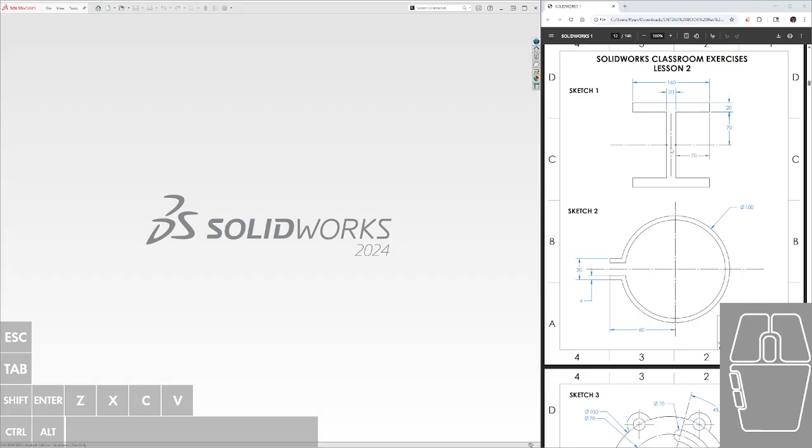This will be a video on our week 2 sketches. I'm going to go through just the first 3 sketches to show off some new techniques. In this first one, I'll show how to mirror. On the second one, I'll show how to use the offset tool. And on this third one, I'll show how to use a circular pattern as well as how to make slots.

Let's begin. This one's a fairly simple part with just lines, fairly similar to your week 1 sketches. But the new thing we're going to learn is similar to the symmetry relation, where we use the center line and 2 lines on either side of it, and use symmetry to essentially mirror the distance that line is from the center. We can also use the mirror tool to take half of a drawing and mirror it over a center line to copy and paste it flipped on the other side.

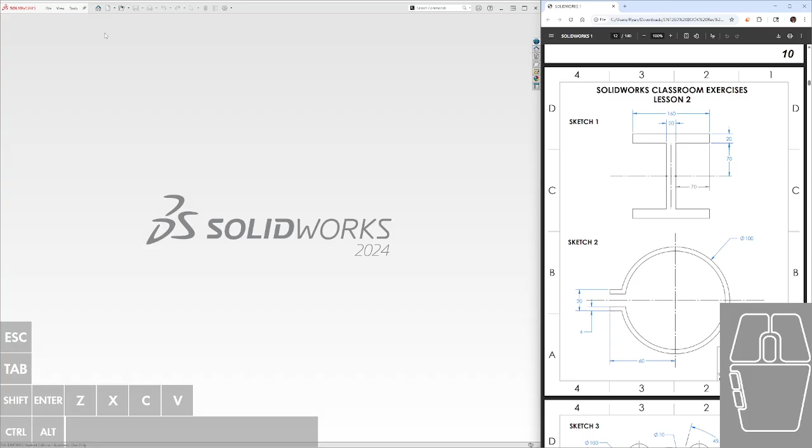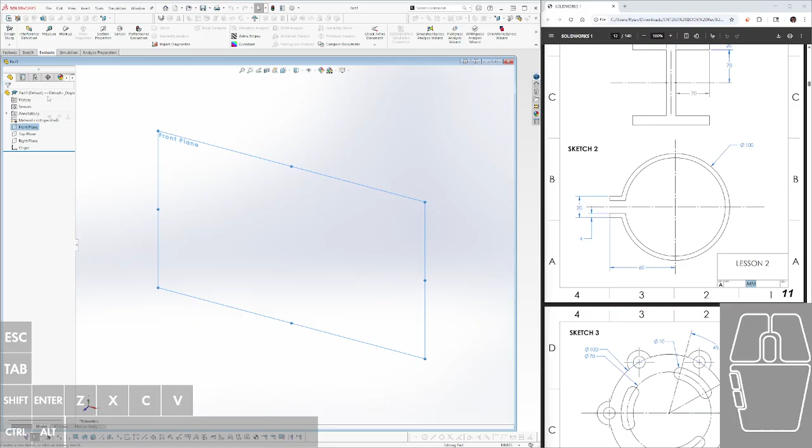So we'll be making a new part. Like always, we look down at our sheet and find that our units are in millimeters. So going to SolidWorks, we have to make sure our units down here are in millimeters as well. And we will make a sketch on the front plane. I'm clicking on front plane, clicking on sketch, and we'll zoom into our part.

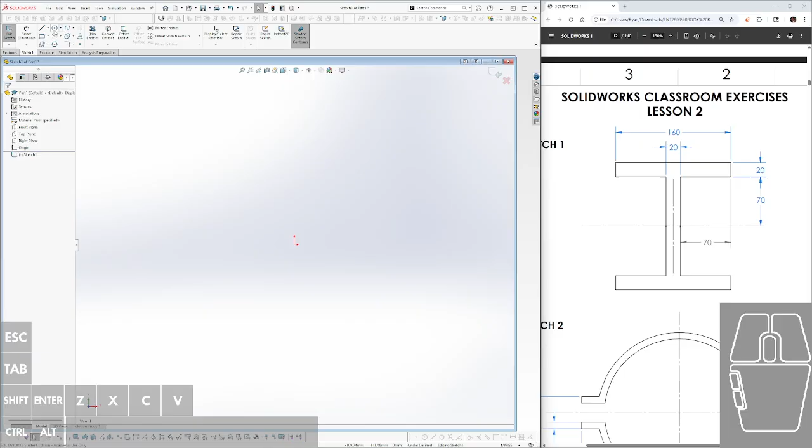So starting with the center line, I'm just going to put this dashed line right through the origin of my part to anchor it. You can see the yellow boxes that pop up next to my cursor are the coincident icon and the horizontal relation icon, showing that the line is horizontal and includes the origin within it.

So we'll start with that, and then I'll draw just the top half of this I. From the left of the origin, I go up, over, up again - and actually I'll show mirroring both horizontally and vertically using the center line. So I'll go up, over, up, and to the right, up to this middle point, and then we'll flip that over, and flip that over again. I'll take my line tool, hold down right click and move to the left, start and go up and to the left, up and to the right, and line it up with my center point.

Let's draw that center line that goes vertically through the origin. We'll just draw it from the line that I just created down to the origin.

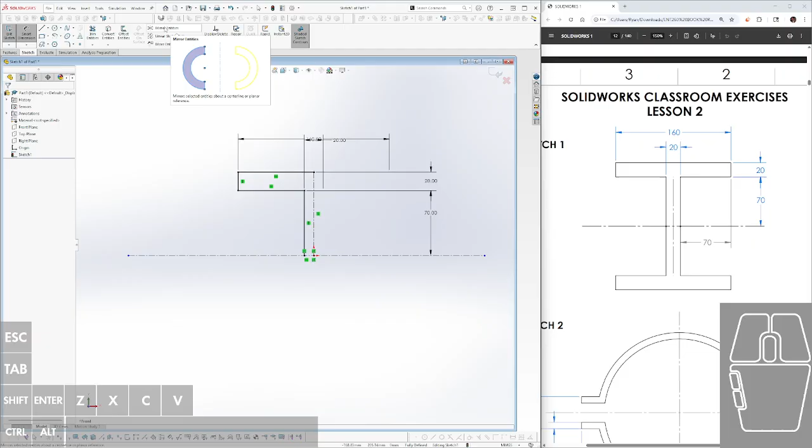Our mirror tool is this mirror entities tool in the sketch tab. In the sketch tab, which again you can always enable if you don't have it by right clicking on this middle region, going to tabs and clicking on sketch.

You can hit mirror entities and it pops up this window on the left with 2 boxes. The first one says, what am I copying? So for me, I want to copy and paste the 4 solid lines I've drawn. I click on all of those, copy is checked. The second one asks, where do I want to copy it, reflect it over - where is the location of my mirror, quote unquote?

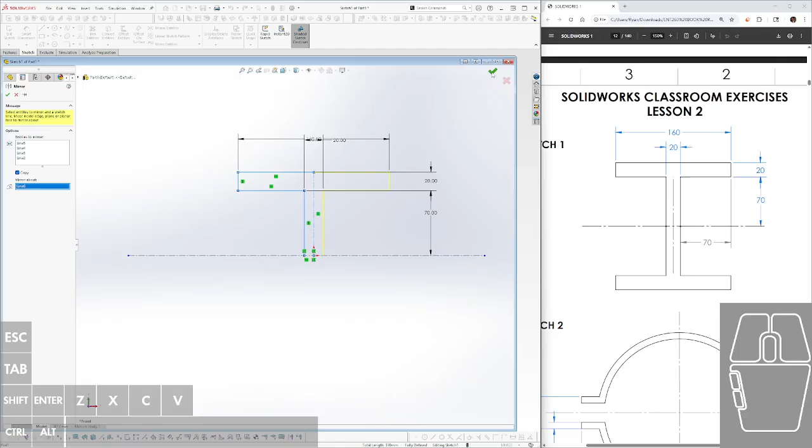So I can either select the horizontal line, and with the preview you can see it mirrors from left to right using these yellow lines. Or instead I can mirror it top to bottom, making these yellow lines on top get reflected over down to the bottom. Either is fine because we have to do both. For now, I'm going to go left to right. I hit the check mark either here on the left or here on the right, or press the enter button. And that's copy pasted, reflecting these 4 lines over the center line as if the center line was a mirror.

All right, so let's do the same from top to bottom. I want to reflect all of these lines, mirroring it about the horizontal line. You can see it completes the I shape. I hit OK.

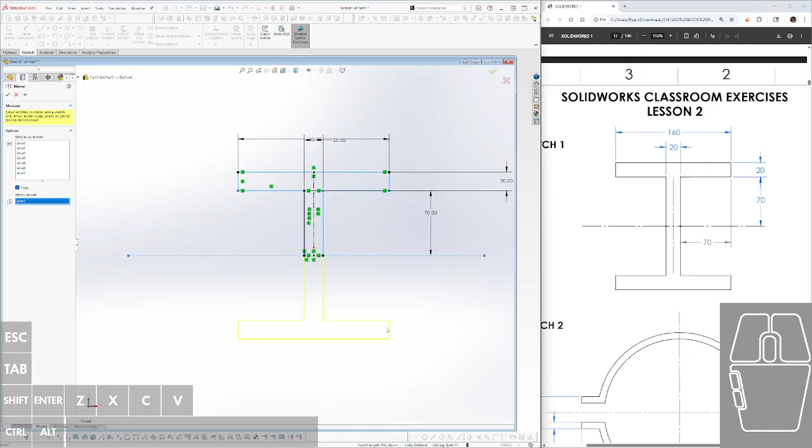And that's our drawing. We have 160 millimeters, 20 millimeters, 20 millimeters, 70 millimeters. Okay, so that's that part.

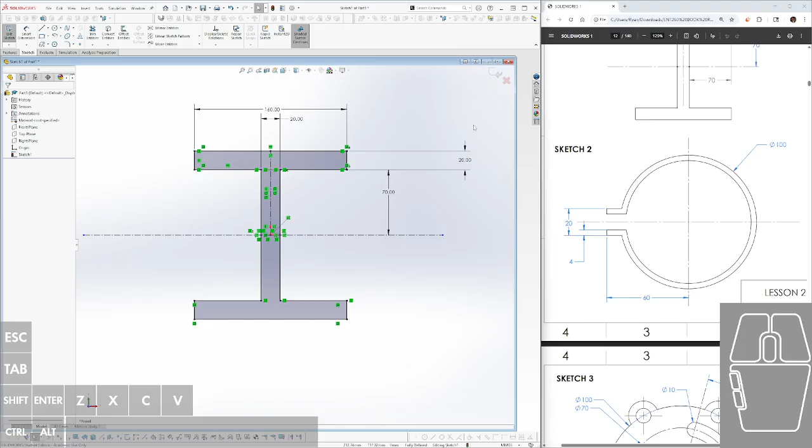Next, we'll be showing off the offset tool. So we'll do new part, new sketch, or new sketch, new part. I'm going to close out of this, open up a new part, hit OK.

So what this offset tool does is it takes an existing sketch and creates a copy of it that is similar in size, so it's a little bit larger or a little bit smaller, or both.

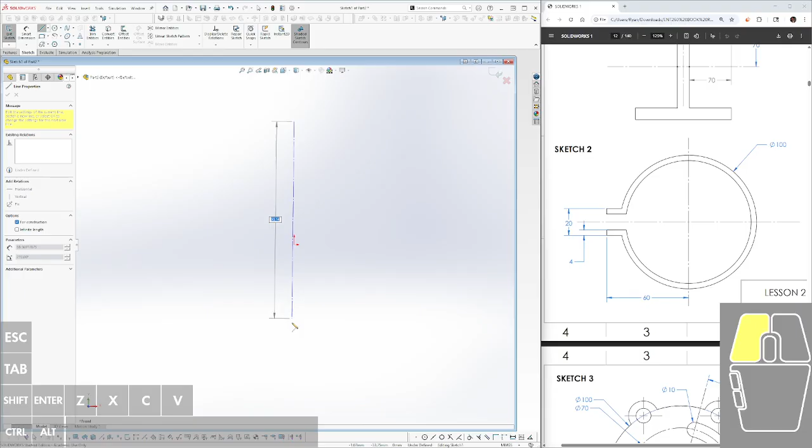For this one, I'm going to put the origin in the center of these circles. I'll start by making 2 center lines that go through the origin. I click on my centerline tool, click, hold, and drag through the origin one way, then click, hold, and drag through the origin the other way, since they're 2 separate lines.

Now, if you're asking, do I draw the inside or the outside for this? For me, I would draw the outside because that's where the dimensions are. You can see that the 60 is from this outside line to the origin, and the distance from here to there is all from between 2 outside lines, as well as the diameter of the circle is also based on the outside circle. So we have the same shape in this ring, once on the outside and once on the inside, and hopefully that'll look a little bit clearer in a second.

So I'm going to start with my circle, starting from the origin, going outwards, and then I have 2 lines, one on top, one on bottom, that go from the center of the circle, or from the circle out straight to the left.

So I click on my line tool, I plop one of these lines down. It looks like it snapped for some reason. I don't want that, so I'm going to just try again. I'll start from empty space, go horizontally to the left. I might see the coincident icon. I see the horizontal icon in yellow next to my pencil cursor, which lets me know I'm snapping to the right objects. I hit escape.

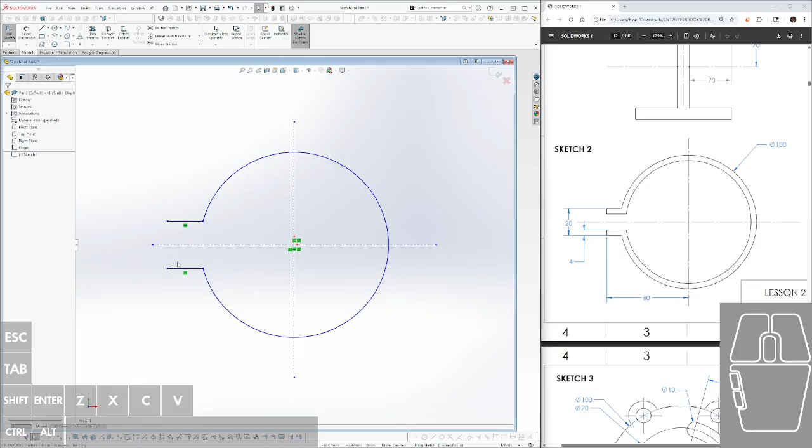And so this is the shape that's going to be copy and pasted with a slight difference in size. So let's finish defining this. This circle has to be 100 diameter, which if you saw has the R symbol to show that it's a radius.

So we will take our diameter divided by 2, since diameter over 2 is radius. Hit OK. We can always change it back to diameter by right-clicking on it and doing display as diameter, which is the second symbol here. The next thing we have to define is the distance from there to there, which will be 20.

They're still blue, so the question is, how do they move? I click on one and drag it. It looks like they either both move upwards or both move downwards when I need them to be equally spaced from the center line. For me, that tells me I need a symmetry relation. So I'm going to click on the things I need to be related, which are the two solid lines and the dashed line. Hit symmetric, and that's locked in.

These blue points on the end of the line are still movable if I click and drag, so those also need to be locked down. For one of them, they should be the same length, so I can either make these 2 points vertical, or I can make these 2 lines equal in size. Both will do the same function.

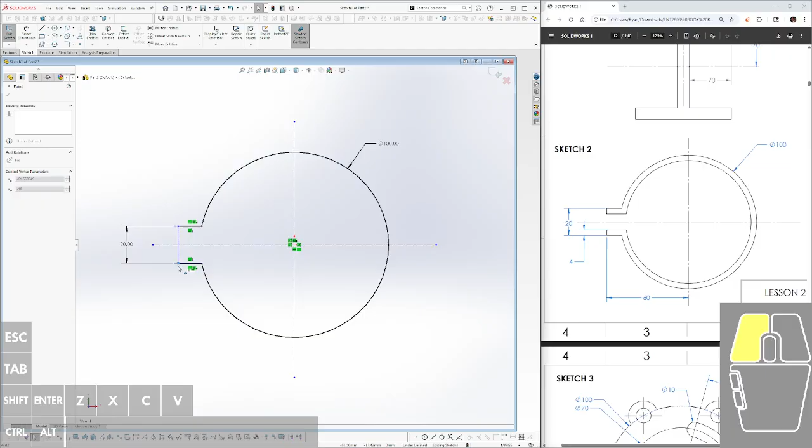So now if I move one with the equal relation, they both move together, but they all still move, and that needs to be locked down. What I'm missing is the 60 millimeter dimension from the endpoint to the center of the circle, the vertical center line. So I click on that, type in 60, and now this is the outside ring of my circle. And now I'm ready to show the offset tool.

So the offset tool is this offset entities button. I'm going to click it.

This parameter here is the distance it'll grow or shrink in a single direction. If I click on my sketch to preview it, you can see it's growing and shrinking by 10 millimeters, which is exactly from here halfway down, and it's making this maybe like fan shape.

We need it to be a 4 millimeter distance, so I'm going to type that in and click anywhere to see the preview change. Oops, let's undo that. I hit Control Z to undo. I hit offset entities again. I should have clicked here, this region, not in the open space.

So at 4 millimeters, you can see it's going inwards, making these yellow lines. So 4 millimeter distance from the horizontal line to its nearest yellow line, and 4 millimeters in from the outside circle to the inside circle.

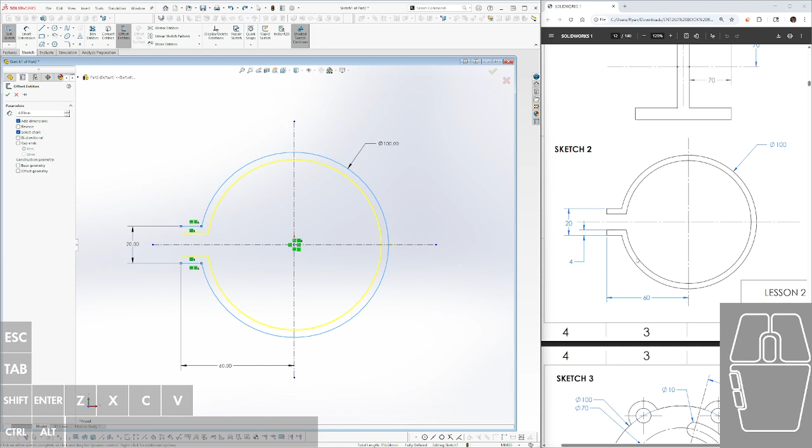And so this looks pretty good, so I hit the check.

And then to finish this off, I just need to close the shape with these 2 lines. I'm just going to connect the dots. Oops, I hit escape, I hit Control Z to undo what I just did. Connect, connect. It shades in because it's a closed region, and that's our shape.

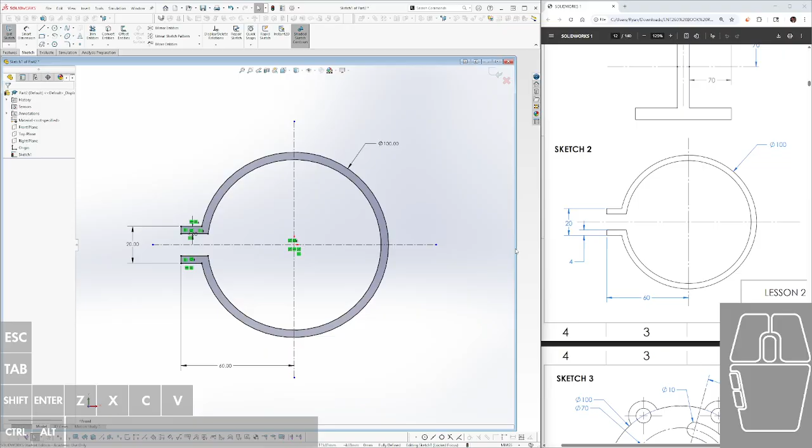All right, our third shape will be this guy. So let's get out of here and open up a new part for a new sketch.

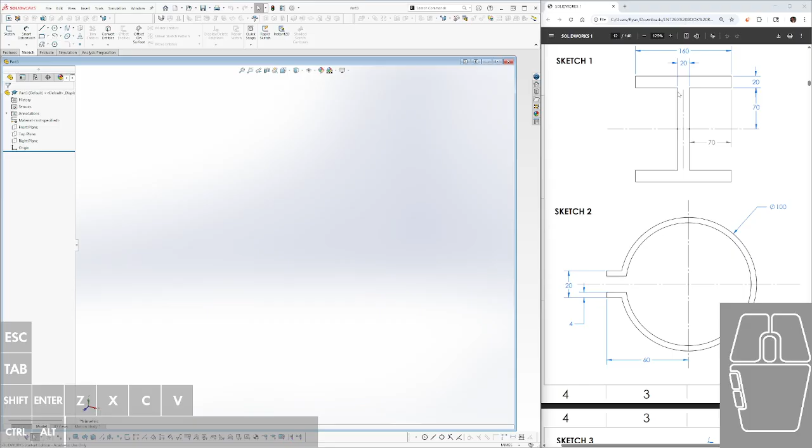So far these tools have just been, the main goal is to save time if you see something that fits the niche. So here it's the same on top and bottom, so maybe I save some time drawing some lines by using the mirror tool to copy it left, right, top, down. Here I saw the same shape but slightly different size, so I decided to save time by only dimensioning part of it and then using the offset to take care of the rest.

On this one, the pattern that I see is that these holes and these little bump outs are copied 6 times around the circle, and so we will be using the circular sketch pattern in order to copy and paste these nubbins.

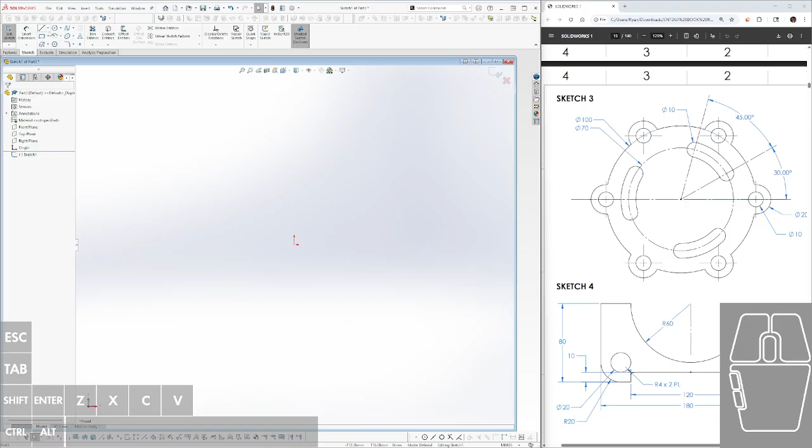So I'll be placing the origin just at the center to lock that down and start getting things to define as I add dimensions. So I hit sketch, I hit front plane, and let's draw everything but these slots in the middle.

So I see an outside circle, so I'll add that. Oops, I missed, but we can just add that later.

And then I'm going to draw the circle that has the most dimensions on it, because hopefully the person who made my drawing out in the field has an idea of how I should make it. And so here, this right circle has both diameters dimensioned as well as the angle dimension, but this is more for the slot. So I'm going to be drawing the bump out on the right side.

And so clicking on the circle again and going to the rightmost point on the circle, I'm going to draw the inner circle, then I'm going to draw the outer circle.

I'm going to then add some dimensions. So this outer circle is 100 millimeters - millimeters again is on the bottom of the drawing down here. The outside diameter is 20 of this bump out, and then the inner circle is 10.

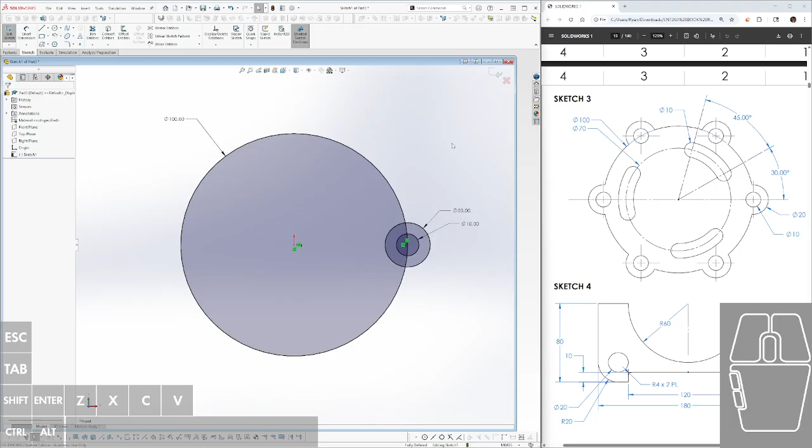Now you can see that none of these are defined even though they all move together, and that's because I didn't lock the sketch down to the origin because I missed on the beginning. So I'm going to lock any point - it could be this point, it could be the bottom of the circle, but for me I'm going to pick the center point of the circle, control click that and the origin, and make them coincident to lock it in, and now the sketch is fully defined.

And then I'm going to use trim entities to cut out these 2 parts of the circle - so any of the inner lines, anything I don't see in my drawing.

So this circle and this arc are what we want to copy a couple times around the circle. And so I'm going to go to linear sketch pattern, hit the drop down, hit circular sketch pattern instead.

And so that brings up this window where the first box is asking for essentially the center point of the circle that we're going to be copying and pasting our lines around. And so for me, that would be we're copying and pasting around the origin.

Then I'm going to skip down to entities to pattern and click on it so I can get a preview. So this is saying what lines are we trying to copy, and so for us we're trying to copy this circle and we're trying to copy this outer bump out. You can see the bump outs up here as yellow lines.

So if we look at our drawing, we need 6 of them. In this box with the pound signs surrounded by circles is the amount of instances that the pattern will create. Let's up that to 6 by clicking the up arrow or replacing the number 4 with the number 6. That looks pretty close.

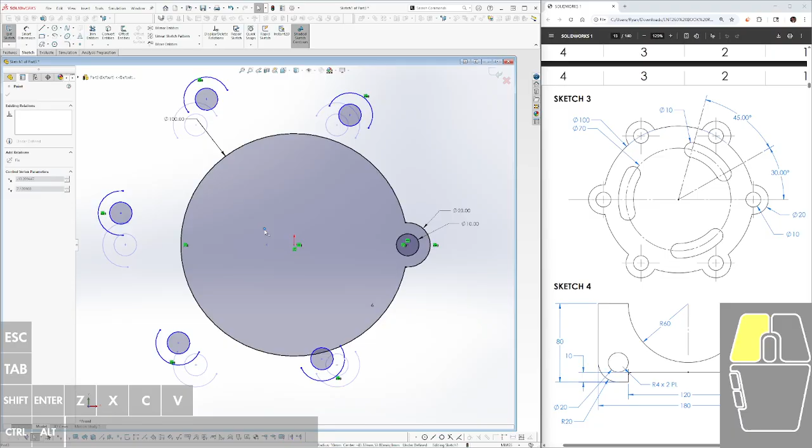Now we just need to add some dimensions to these. It looks like they can zoom out and zoom in, essentially expand and contract. The one thing that's expanding and contracting as well is this center point. If I click and drag it, I can see that it's moving all of the patterns. I need to lock that down. This center point of the circle of copy patterns should be locked down to the origin.

I'm going to click on the origin, or the center point of this big circle, if you didn't already lock the origin to the center point. Then I'll hit coincident to lock it in, and now they go black. I'm just going to use the trim entities tool to trim out parts of the circle that I don't want.

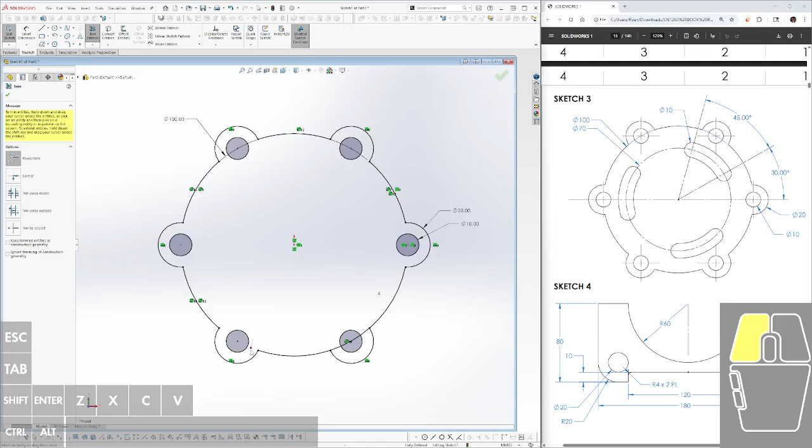And that's the circular pattern tool. We'll do it one more time with the slots.

These arc slots, 3 of them - this one up here is well defined as starting from 30 degrees for the bottom arc. The center point of the bottom arc is 30 degrees above the origin, and the top center point is 45 degrees from the bottom center point. The radius of the arc itself, the slot itself, is 70 millimeters in diameter, so 35 millimeters in radius for the overall slot.

To make a slot, I'm in my sketch tool. I can do center point arc slot or 3-point arc slot. Let me first plop down this construction circle. To do that, I plop down a solid circle, then hit the for construction box that pops up, and it goes from a solid line to a dashed line to show it's not part of my drawing anymore. I dimension that to 70 millimeters.

Then I draw my center point arc, the 4th option in the dropdown. The center point arc, as it shows in this drawing - the first click is on the center of the whole slot. Why did it do that? Let me try it again - center point of the whole slot. Starting point of my slot is the 2nd click, ending point of my slot is the 3rd click, and the thickness of the slot is the 4th click.

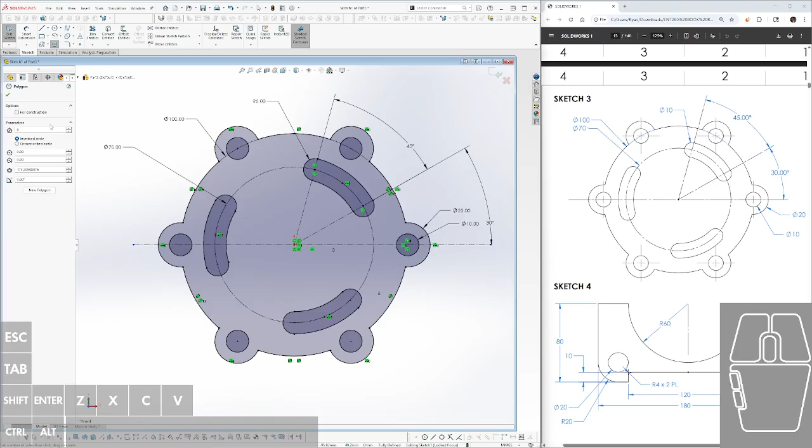If I click it, it's going to make an even sided polygon with equally sized sides. Right now, this is saying it's a 6-sided polygon. If I click and drag, it makes a hexagon with all equal sides that I can plop down. If I hit the up arrow, it goes up in the amount of sides, and if I hit the down arrow, it goes down - from a hexagon to a pentagon to a square to a triangle. I don't think it goes below a triangle because that would not be a polygon.